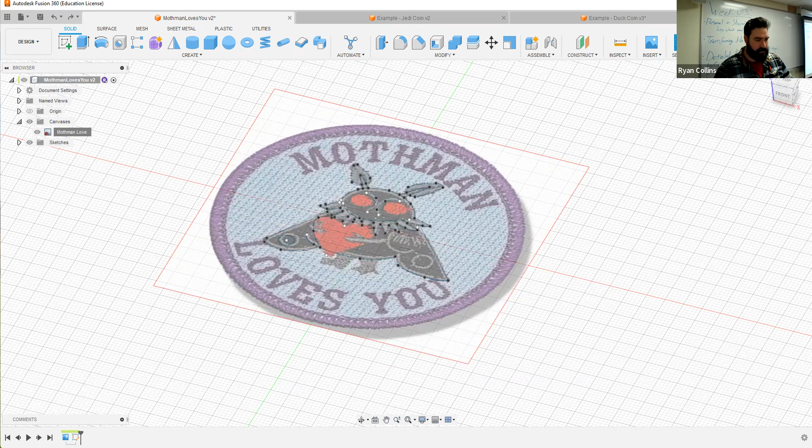Once I began, I'll go back into my edit sketch - if it'll let me. What's going on here? It's not allowing me to go back into edit sketch. What's going on here? There we go, that was weird.

All right, so just to show you the progress - mainly what I wanted to show you as a start point here is how to make text on here, as well as the edges, and then also add features like the keyhole, for making this a keychain or whatever. So to hide the badge for a moment, a couple things.

I got most of the profile done. I don't have legs on it or the eyes all defined or anything like that, and I did part of the heart. So I stopped here for a couple reasons.

One, because I want to get underway, but you can see the difference between closed sketches and open sketches. The difference being that if it's a closed sketch, it can be extruded as a solid body. Now, there are different features, and I'm going to show you that in a moment, but a closed sketch will have this blue hue to it.

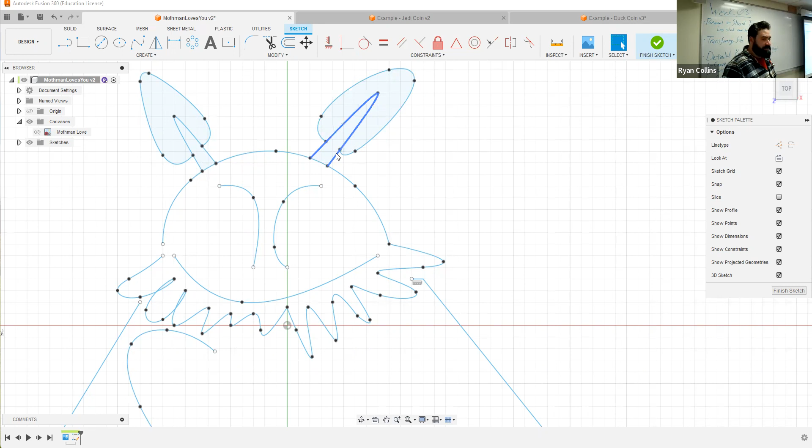When you mouse over it, it should show as a black outline - same here, right in the center. But if you're just mousing over the line itself, it won't; it'll just highlight the line. So if I select that, you can see because it's a fit point spline, it'll bring back up my handlebars and all that, so I can make adjustments.

The head and the rest of the body and such are not. Some of the features, I added like a little circle here, and you can see the little patches on there and that sort, and I'll make the arm and such anyway. But a couple things I wanted to show you how to fix, or rather how to continue.

So one of the things is this heart. I don't want to have to draw all the little features - of course, it's not very complex, but there are some other tools you can use. One of the things being, of course, the mirror tool. I did half of it; let's let the program do the work.

So in order for the mirror tool to work, which is this double triangle, select that - your toolbox will come up. You'll have your objects, you select the object. Next one is a mirror line - well, you have to have a line for this to work, but I don't want to add an unnecessary line here.

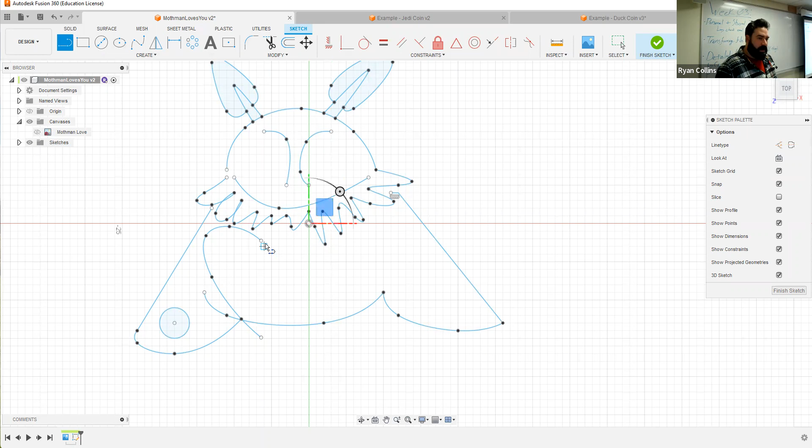So when I go to my line tool, or press L, I can draw a line straight up and down. And you can see as I mouse this over, it already snaps this little green dotted line down to the other point. That's because both of these are straight up and down from one another. But that would be a solid line - now that closes the heart.

Great, let me hit enter, finish. I don't want it to be that - I can toggle this line into a construction line, and this is why you'd want to use construction lines in this case. You can either toggle it on the toolbox over here or press X on your keyboard. Now that sketch is still open, and that is a dotted line. That means that sketch line is there for reference, but it's not going to interfere with my line.

So it's excellent to be able to use sketch lines to give yourself reference points. I can go to the mirror tool, select the object, then mirror line, my sketch line. Now I have that, let the program do the work.

Of course, you're going to see all these additional little markers here, tons of them. That is a constraint. If you go up to the top toolbar constraints, that is the symmetry constraint. That also means that if I make alterations to one side, it will do it for both sides, so they are symmetrical, they are linked. I'm going to leave it where it is.

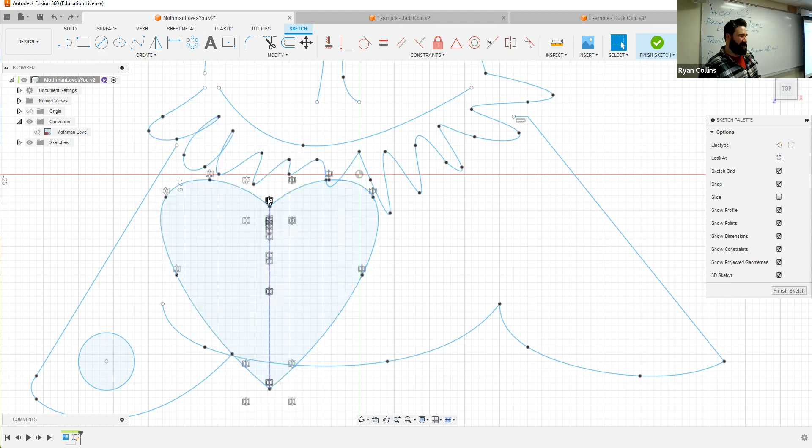Super duper. All those construction, all those constraint points does kind of make your eyes go crossways, but there we are. Now, this is one of the issues of making multiple sketches.

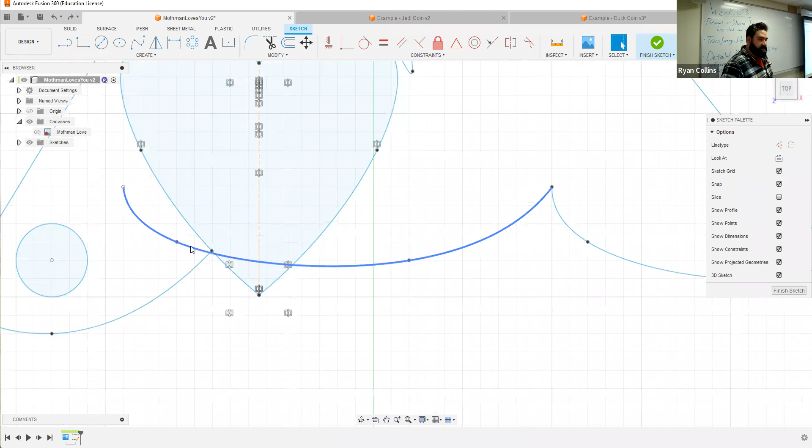Despite them all being on the same plane, you can see right now as I try to mouse over, because this is all on the same sketch, the bottom of the heart and the top of the heart are treated as two separate sketch objects because there's a shared line going through. So while it's not a problem right now because it's not very complex, if you were planning on making this a much more complex thing, you might want to make the heart on a separate sketch so that when you go to extrude it, it will be treated differently.

Let's see here. So one of the other ways to approach this, where is the thingy thing? It's pretty simple.

So like I said, this might be one of the cases where it might have been better to create this sketch on a separate sketch so that it's a different layer and you can toggle the visibility of it. Right now, this is all the same thing. If I want to do that, I can start a new sketch and just copy and paste this onto there. But let's stick with what we got right now.

So that's using the mirror tool. That's now closed, the little heart's closed. Let me open up my canvas again.

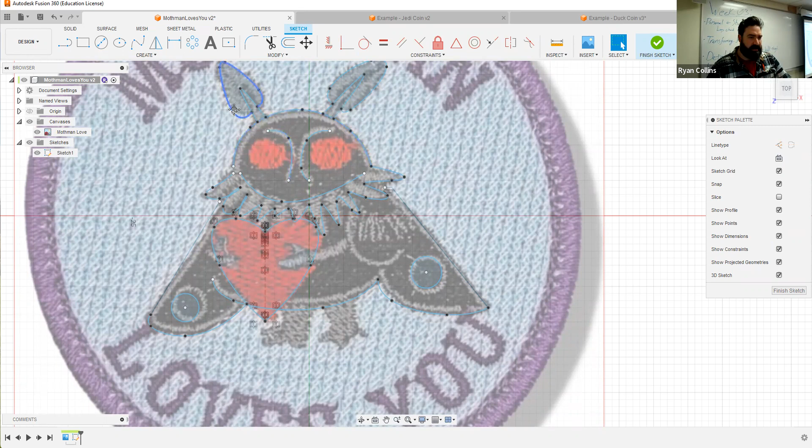I'll make a couple little things here. I'm going to try to snap a couple of circles here. Great, I can make the eyes a little bit better. But let's close up this sketch so at least I can actually make this a finished thing.

So now I have these three points. I can either add some lines, or I can also drag this. I can click and drag and pull this point around. I'm not going to have a lot of motion with it, plus I kind of like where it is, so I'm not going to mess with that. Let's leave it where it is, and I'll just add in some additional lines.

So a couple things you can do with that. If you've got a line going and you don't want to draw it by hand, go to Modify. You can use the Extend tool, and that literally just extends an existing line to what it assumes is going to be the next, taking the geometry and trajectory of that current line.

You mouse over, and you can see this little red line that pops up. Select there, bam, it throws in an additional line, and it already almost connects over there. So to finish that line, because I still have the tool active, I can now mouse over that line, or I can drag that vertex to the adjoining line. Why not let it snap closed? Now the whole top is closed.

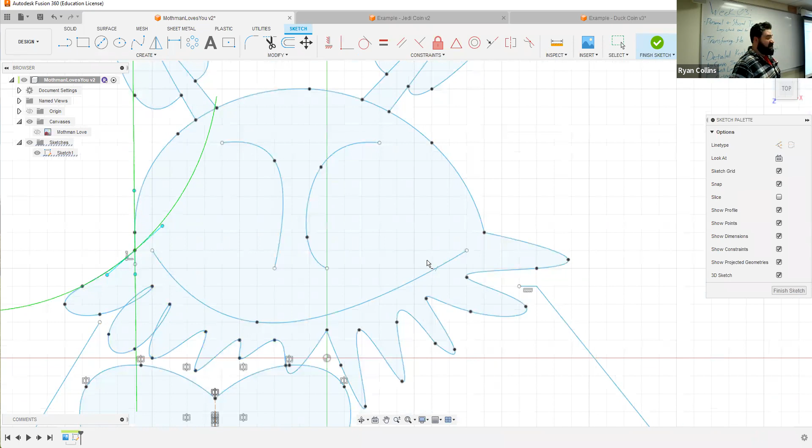Convenient. This got to be weird, I don't know where that little angle line came in. So let me trim that off of there. Hit escape.

That all is still good. Let's go to trim, I just need to nip that little chunk off. Great, go back and use extend again.

Extends the line to the next. You can see you can keep going because it assumes that you want to extend that line to the next point that it would potentially cross. Again, Fusion tries to be intuitive, but sometimes that intuition gets to be problematic.

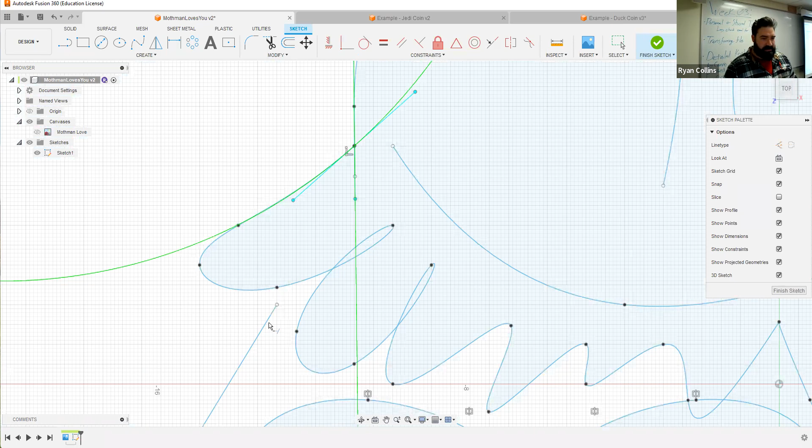All right, that's all closed. Let's use extend again to close that up right there. Great, now I have this all closed. This is all a closed sketch. All right, so a couple things I will note, and I'm going to show you how to address these.

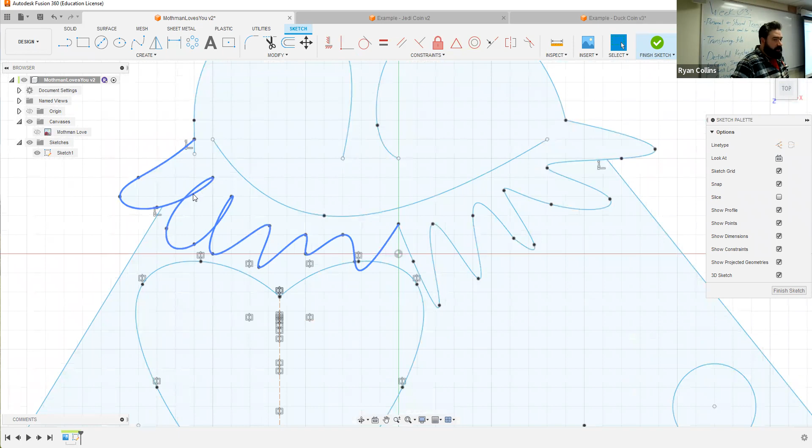Fusion works great on a lot of things, but anytime lines cross one another - not intersecting, but going back and forth over another - that can cause problems. You see how these are overlapped here, and I'll bring my canvas back up. That's just me using fit points.

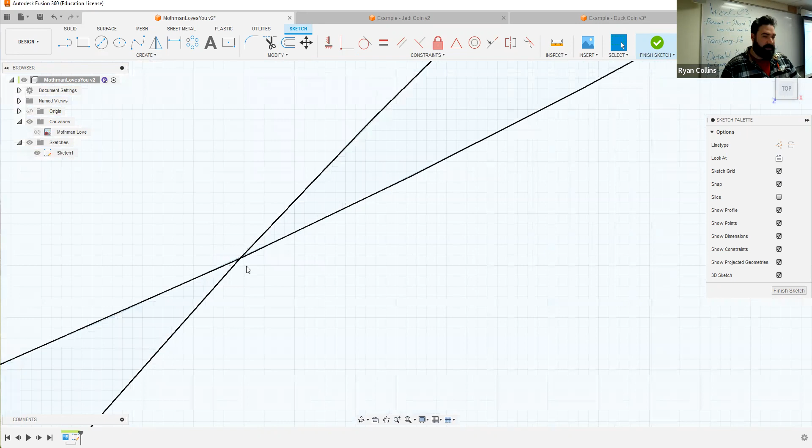I might be better off editing those out, or at least trimming a chunk away. So I might go back and use the trim, and you see the problem here is, oh no, that's going to trim all of it. That's a problem. So if I needed to edit that away, what I'll unfortunately have to do is draw a line between here.

Now I should be able to isolate that and trim that away. I'm going to see if I can just use that line as a construction line. So I toggled that, hit X. Let's see if that works now. Good, still does. So that way I can use that line, trim that away. Yes, it's going to give me a warning because constraints were changed. That's okay, but now that's missing.

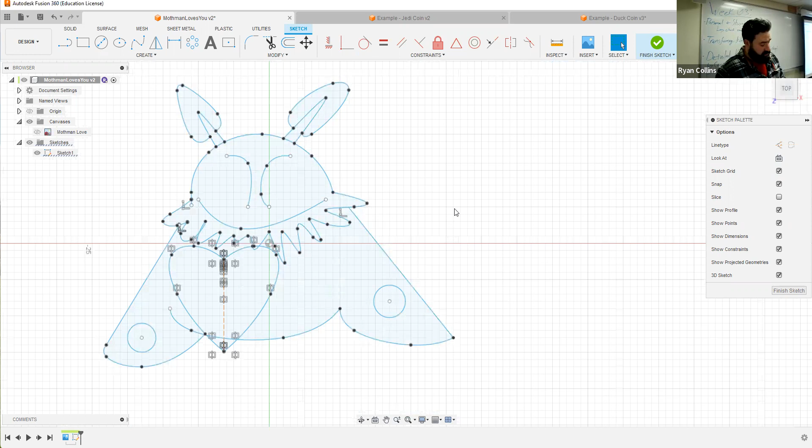We're good. That should work, so I can go along and do all that. I'm going to show you what can happen without it. All right, so this is all closed sketches. Mothman is close, but not quite there. Let's work with some extrusions. So let me hit finish sketch, save. I'm going to add myself some notes: Mothman outline done. Great.

Now I can start to play with some extrusions. So like I said before, you can stack extrusions as well, and that's how you can make multi-level things here. So let's start with resizing, and I'm going to hit the home button so I get a 3/4 view - it's easier to see what I'm doing. Just start extruding. Mouse over the extrude tool, or as the pop-up shows, you can just press E.

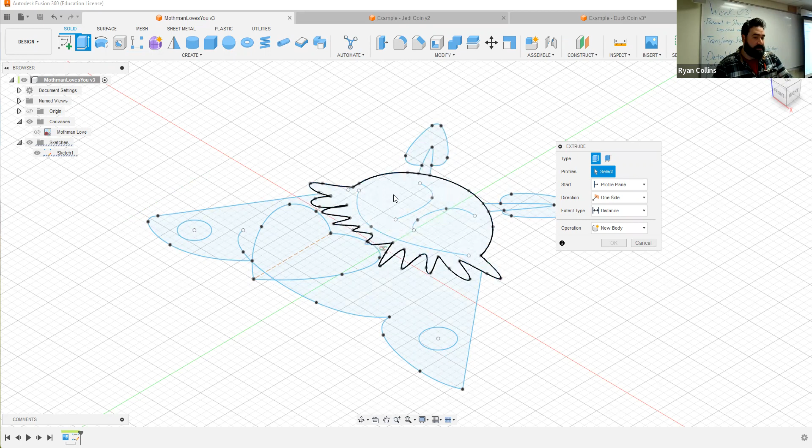That works. So most of this is one body, or rather, one closed sketch - the head is one closed sketch. Let's say, I don't know, 3. All right, now right now that also came up as green. That's probably not how yours is going to look. I'll address that in a moment.

First, I want to talk about the toolbox here. So you have, first off, types: extrude and thin extrude. I'm going to explain thin extrude in a moment - this is a way where you can extrude just a line that is not a closed sketch. So I was kind of lying to you earlier, but not entirely.

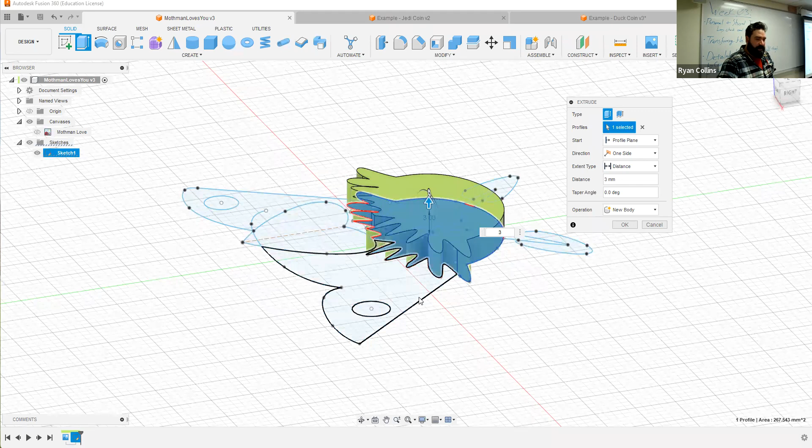Your profile selection is obviously the profile. If you want to add more, you can keep going, but that's not what I want to do, so back out of that. Oops, since I accidentally hit Control Z instead - I should have just zeroed that out.

Just as a reminder, you can go back up, hit the extrude, press E, or if it is a recent command, right click on your mouse and the recent tools or most used tools will come up. Going straight up is the one you just used, so I can repeat extrude - it's just a way to streamline what you're doing. Select that one again, go up to 3.

Okay, I'm going to say start at profile plane - this will come in handy in a moment. You have some others, offset and object. Right now we're going to leave this at profile plane at the start point. Direction, one-sided - you have two sides and symmetric. If you're making something extrude in both directions, right now we're just going to use one-sided.

An extent type is distance, where you can either add it in numerically or use the drag slider. To object, it can snap to another object - we'll ignore that for right now. And all is just all the things, it will just snap to anything visible. We don't have anything visible, so ignore that. We're just going to stick with distance. Then there's your distance right there, 3 millimeters.

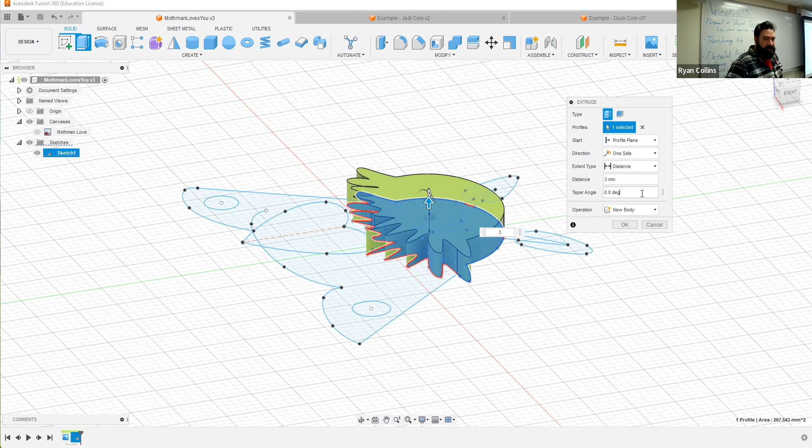You can also taper this, so you can add an inward taper or outward taper. Too much, and it will go nuts on you. Let's see about - wow, 3 is, even 3 is too much, huh? Okay, it's giving me an error because of the complexity of the little Mothman beard. If this were a more simple form, it would be able to perform that much more effectively, but because of how complex this is, it gets weird. So we'll just leave it at 0.

There we are, all right. Operation: new body. Now, as we start to add more, it will automatically try to join them together. You can either leave them as all individual bodies and join them later, or just let the operation do it and join them as you go. I prefer to keep things separate in case I want to make individual operations and then join everything later. For me, I just prefer to work that way.

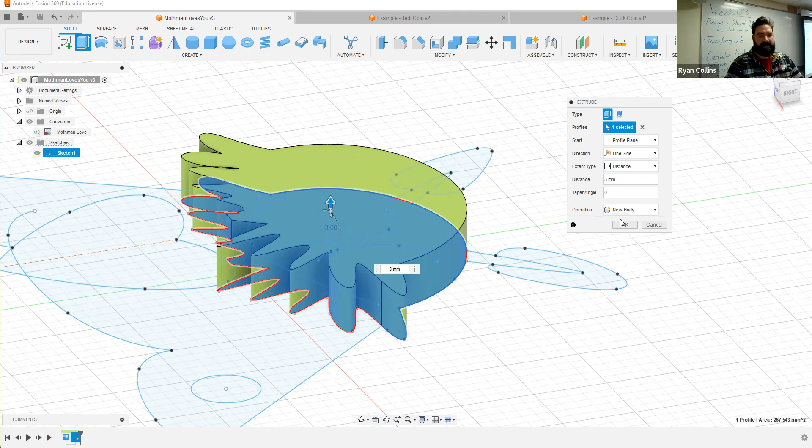With this project it doesn't really matter, it's however you prefer, so I'm going to keep it as new body. Now, like I said, once you finish one sketch extrusion, Fusion assumes you're done with that sketch, so it hides it. Just go back to your browser, your hierarchy tree, find the sketch, toggle the sketch visibility, and it'll pop back in.

So real quick, the reason this is coming up green and your default is probably coming up as this metallic silver is because I was using the appearance toggle. That's pressing and holding shift and hitting... whoops, I hit multiple things, not what I meant to hit.

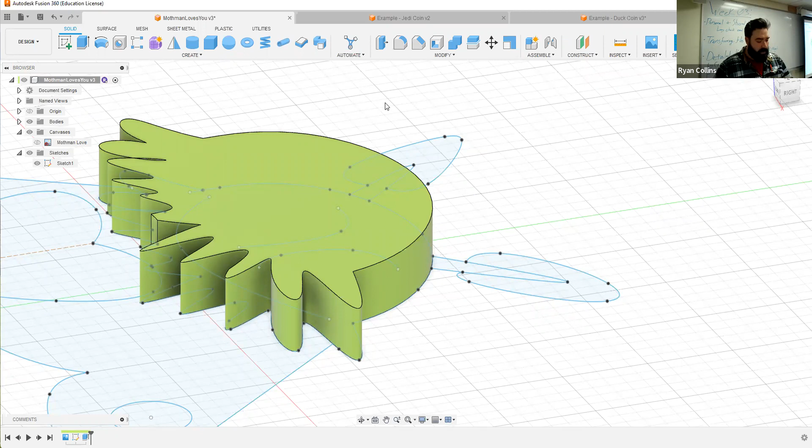That toggles it between automatically assigning colors to different components or appearances. We're going to talk about appearances in a minute, but appearances are basically how you can apply real world surfaces to the model so it looks like the real thing. It has no effect whatsoever on how it gets printed, it's just for modeling realism. So I'm going to leave it green because it's easier for me to see.

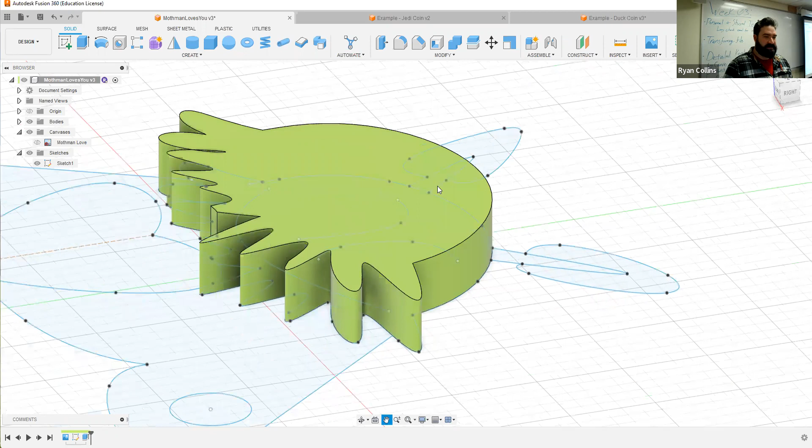All right, great, so got all that. You can see also how it did not add that little notch there. That's because the heart was there that intersected. I should have made that a little bit higher, so I don't know yet. So speaking of, let's go ahead and extrude the heart.

Whoops, I accidentally hit joint before. All right, now like I said, there's that line in there. I want to make sure that I'm getting both sides of the heart. All right, and we'll go up 2.

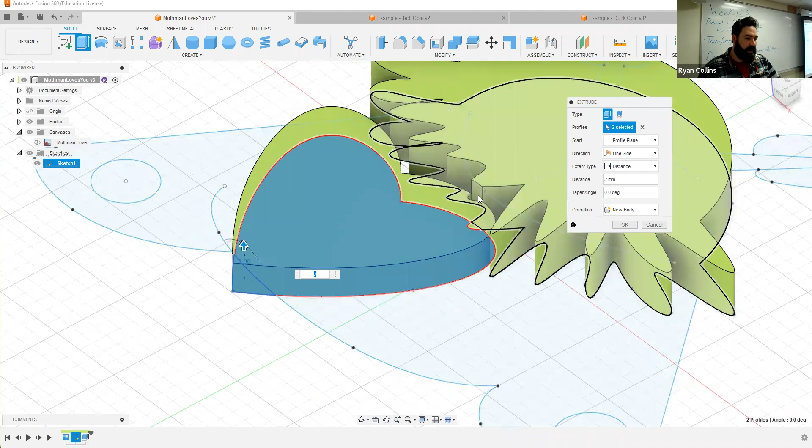So one issue, it's leaving that little notch there. I will need to go back into that first extrusion and actually alter that. So because these are only barely touching, they're only adjacently touching, not actually overlapping, the operation is staying as new body. So I'll leave it at that.

I want to go back and fix that. Go down to the bottom of the screen, go to your history bar, right click on the previous one, go to edit feature, and now I can just make sure to select that little notch, boop, and it adds that little blip there. There we go, that's all. So now it makes sure to overlap.

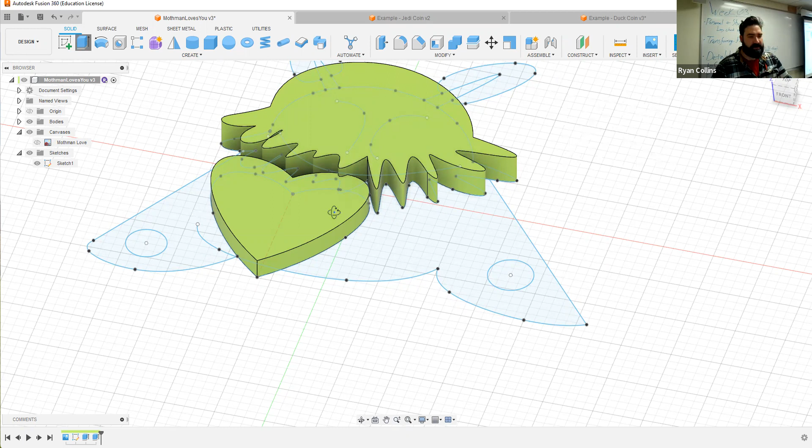Great, so this is how you can keep adding different levels. Keep adding extrusions, and I want to make sure to get all of those. Now you see how these are red lines as it's intersecting this existing body? This is because you have the potential to cut into the body.

Now here you can just drag up or whatever. Now that these are joining, now that these could form a whole body, the operation has changed to join. I can go back and manually go back to new body if I want to keep it that way. Fine, there we go, I can join all these later.

Great, so we got a bunch of different features here. Again, I can always keep adding stuff. Let's do a couple more. I'll add the little antenna, we'll make that to 1. Then I'll go back inside to the intersections here, select both of those, and we'll say 2.

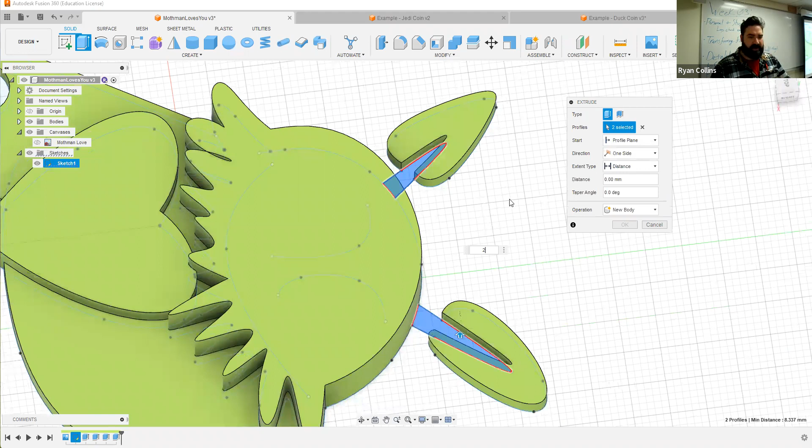Again, it's going to try to join those. You can if you want, or leave it at new body, doesn't matter. All right, so now I have these multiple things.

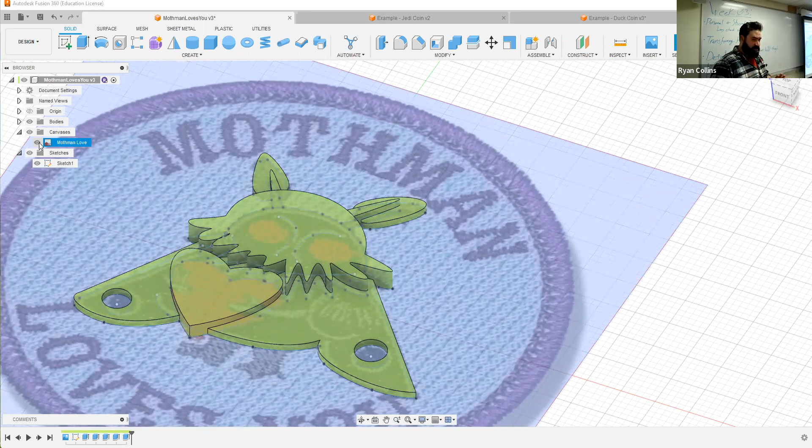So I do want to add some text and a larger diameter around it so I can make this more of a full badge. You do not have to make this a singular badge, this could just be a floating body if you want, up to you. But in this case, a couple things I want to show you real quick.

I told you about the other extrude option, so let's save here, full extrudes, just making some notes. Again, when you open the data panel, you open up your different versions, that's the little notes there for myself: sketch started, Mothman outline done, full extrudes. Just to help you on your versions.

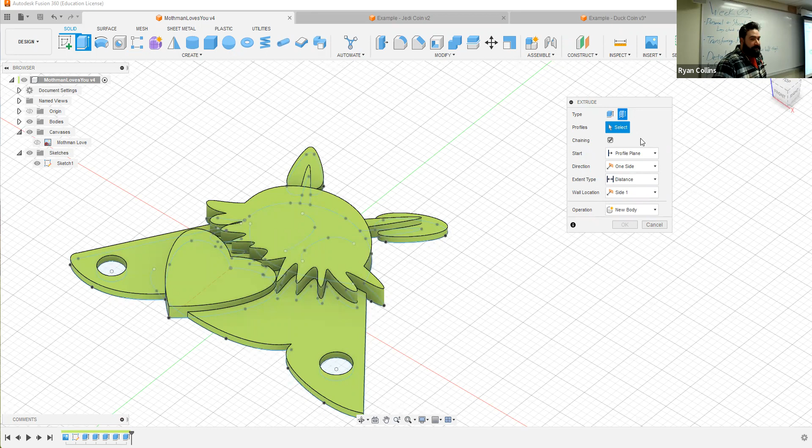All right, so I'm going to bring up the extrude bar again, but this time I want to play with the other tool, thin extrude. This is a way to make a single line a full body. So what it does is it kind of combines the extrude tool with the offset tool. So what I'm going to do is I'm going to select those 2 eyebrow lines.

There we go, now I have a couple of options. Right now everything is default, everything is staying where it was. I'm going to use the drag tool and drag upward, so I'm going to drag upwards up through the body. Now, right now, you can see how they've changed to red.

Now, as I extrude through, the operation has gone to cut. That's because it assumes that since I've dragged those up through the body, I actually want to cut that away. So you can do that, or you can switch this to join, and it's going to be a thin extrude right there.

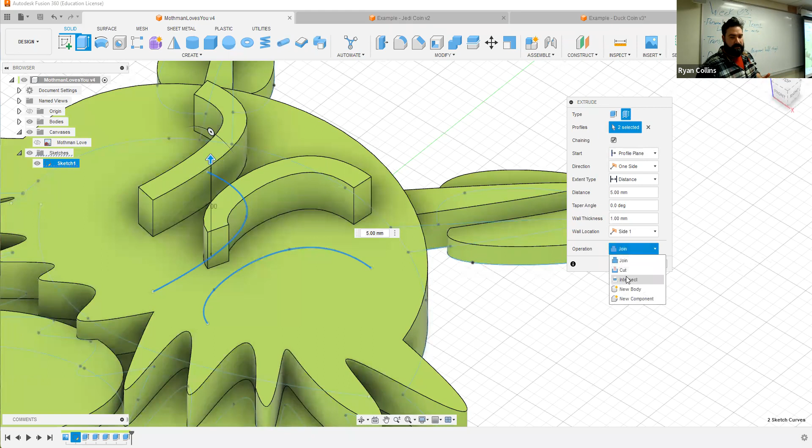Other things on here—this is extruding all the way from the bottom. What if I did want that to cut, but didn't want it to cut all the way through? What if I just wanted a slight indentation? This is one of the parts where you have to start changing the way you approach something, rather than thinking like, okay, I drew this on a piece of wood and I want to cut this away.

Well, I would need to chisel down into it from the top. Actually, that's a little bit closer to reality. In this case, where I had extruded up from the bottom straight through, that's not how it works. You actually want to treat this a little bit more like how it would actually be carved in. So to do that, you can use some of the other options here.

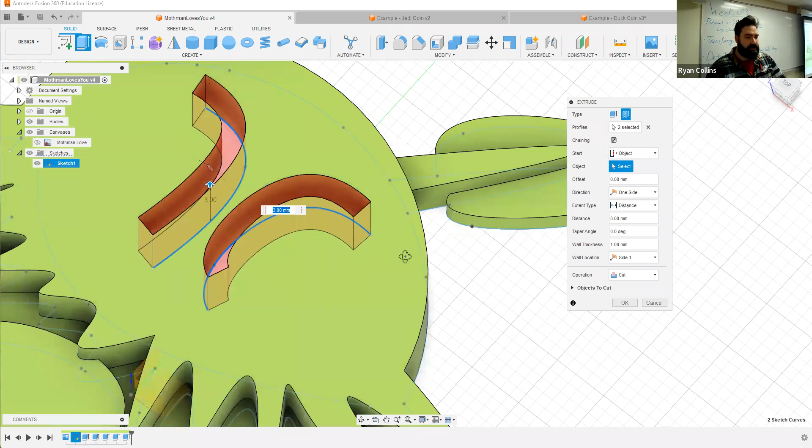Things like start—start is at the profile plane. I can start this either way. Let's say start to the object. I select the top here. It's now going to extrude starting at the top. And if I extrude upward, it's going to go all the way through.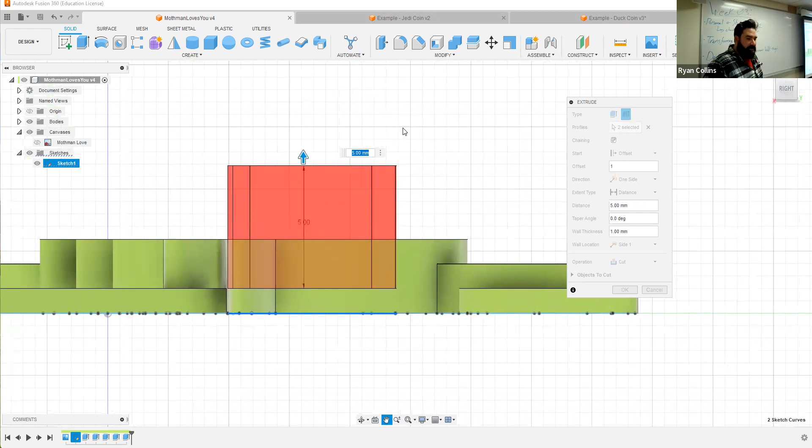But that's still going to mess with me. So let's instead change to offset. I can offset that by, say, 1 millimeter. Now what it's doing—let me go to side view here—there's 1 millimeter between where the extrusion started and where it's drawn. So I can actually start from right there. Really slick feature.

And then I can go upward and cut through. That said, I can also use the object option. Let me just zero all this out—distance 0—because sometimes it does weird things if you don't zero it all out. I can start this at the top, and then instead, the sketch, or that extrusion, will begin at the very top.

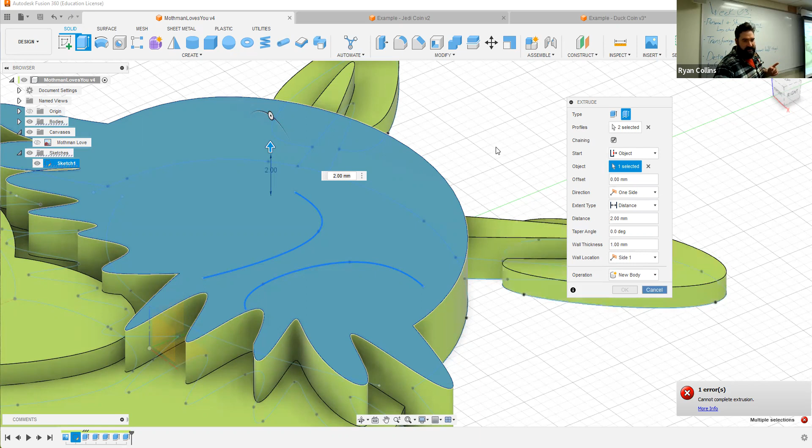All right, what's going on here? Cannot complete extrusion—why? What's your problem? It's giving me weirdness. All right, sometimes you have to restart the extrude. Let's do thin extrude. I have had problems doing that sometimes where you start from blank or change stuff around, and if it gives you weird errors, it's best just to cancel that tool and start over.

So now I'm going to start. The first thing I'm going to select is object. Select the top face here. Now when I extrude upwards, it still gives me the same error. What's your problem? I'm not sure why it's giving me that error. That's weird.

Okay, well then ignore it. We'll just use the offset tool, same thing I did before. We'll do an offset of 1 millimeter, and it starts going up. Let's go up 5—doesn't matter. Okay, there we go. Direction, we're going to leave that as one-sided.

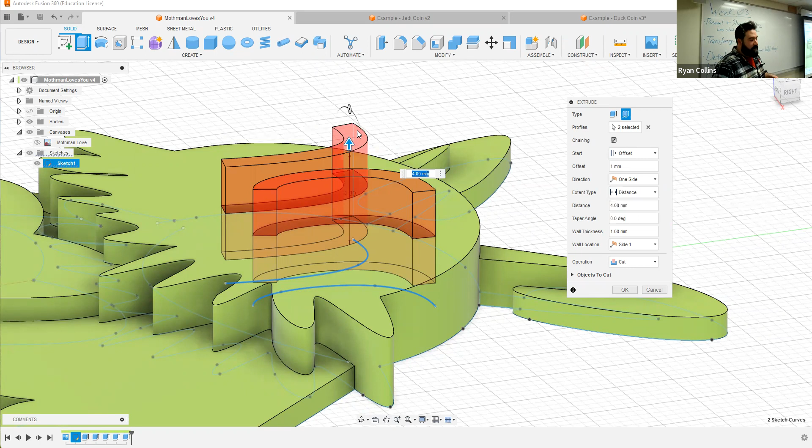Now, the other thing is extent type. Right now it's been distance. You can use the same sort of selection features as before. So distance is just like adding and subtracting numerically or using the slider. However, the parametric modeling option in this case would be extent type, selecting object, and I can select that top face. Now it's going to extrude those little cuts only to the top face.

But the good thing about that is—and I'll just leave this as cut for right now because I want to show you something—okay, it's going to cut all that, and we can also adjust the size of those, the diameter, or sorry, the thickness of those line cuts.

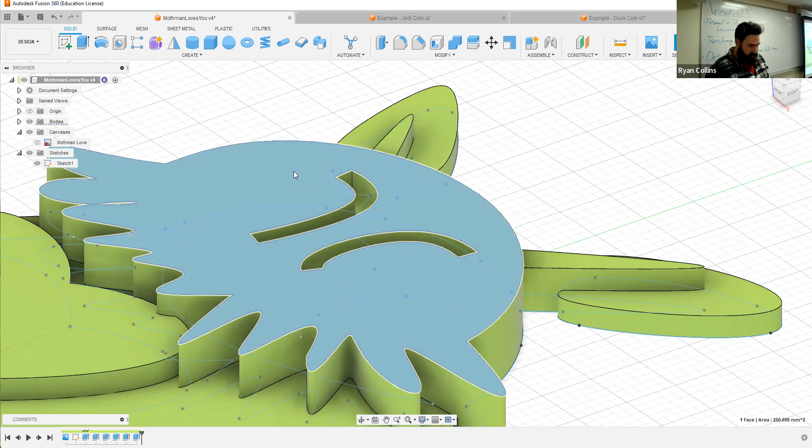That's fine. But if I had done this just by distance, say I put in 3 millimeters, so that's how thick it is, right to the top. If I decided, oh, you know what, I want this to be a little bit thicker, and I move the face up, I might now have to go back and change the dimensions of the extrude and everything. But in this case, because I used the extent type—let me open this back up—extent type to object, and selected the top face here. And again, I use the offset, so it is starting a little bit further, 1 millimeter away from the bottom.

Now, if I go back and change that first extrusion, I could change this to 20 millimeters thick.

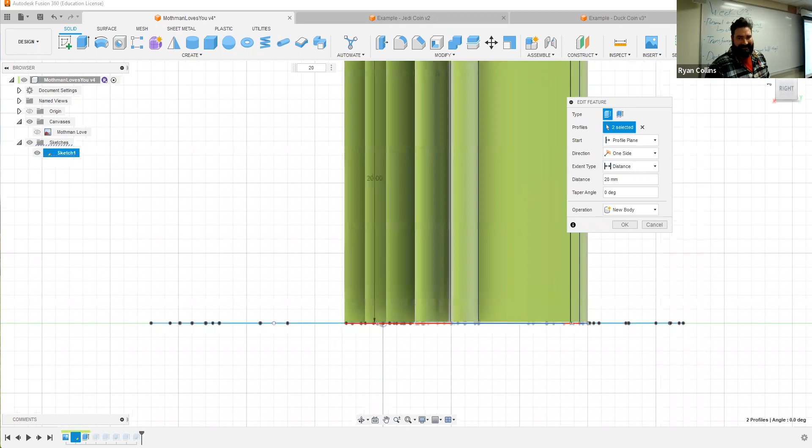Again, because I went back and changed this in the past on the history slider, it recalculates. It will always make that cut to the top of that face. So no matter how thick I make that cut, because I chose the extent type to the top of the face, it will always make it there. So that's one of those things, and if it's an option, choose that option. It makes it a little bit easier.

I obviously don't need this to be 20 millimeters thick. Let's go back to 3 or 4 or something. There we go. So there we are.

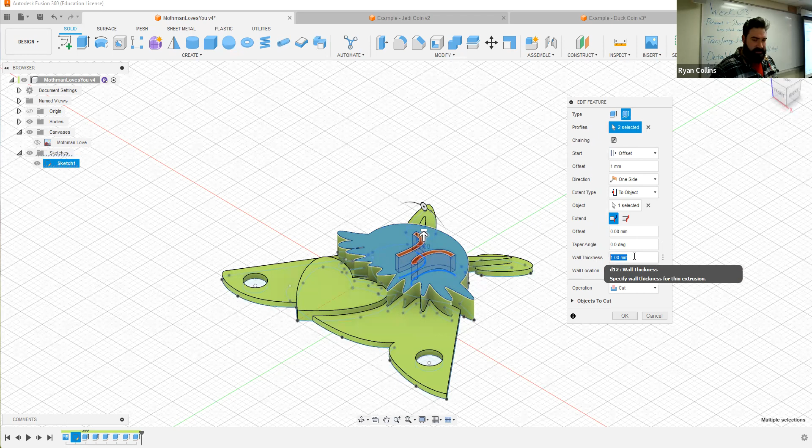That final extrusion, last thing I wanted to show you, is you can also adjust how thick that is. Down toward the bottom here, it says wall thickness. That's going to be 2 millimeters thick because the wall thickness is 1 — it's offsetting on either side of that line by 1 millimeter, so 2 millimeters total. If I only wanted it to be 1 millimeter thick, I would say 0.5, and now it's a little 1 millimeter slit. There you go, now it's kind of got a little adorable angry face or something.

I don't know. So we'll add features and yada, yada, yada. Okay.

So the next thing is I want to add text and such, so let's do that. I've made all these extrusions, these are all different things. Fine, fine, fine.

Let's start a couple of new sketches here. This is why I would prefer personally to make these intentionally separate sketches — it keeps things separate and makes it easier for me to navigate. You choose how you want to work, but if you're trying to make like a single image and extrude all that, I would keep that all as mostly one sketch, or at least major features on separate sketches. This would be a major feature change.

So looking from the top down, I want to make this as kind of a badge here and add my text. All right, so let's start a sketch. I can hide the existing bodies, starting on that top plane here.

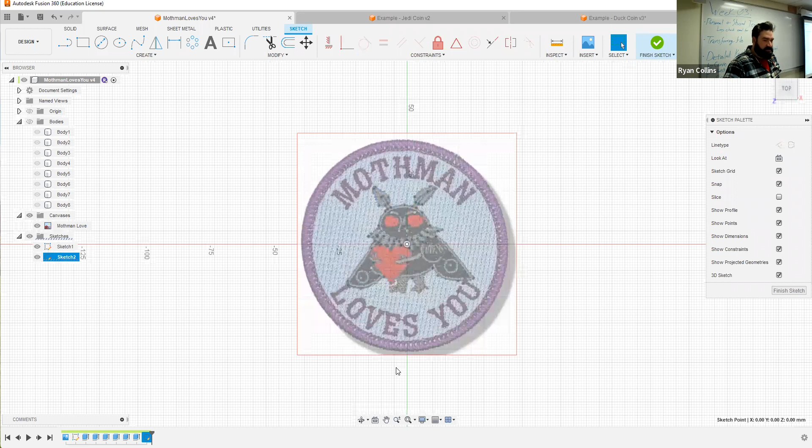Now, the problem is this circle isn't quite centered at the origin point in my sketch plane, the intersection between the x-axis, the red, and the y-axis, the green. So it's harder to use a center point circle, because if I try to get right there in the center, you can see it's close, but not really. Now, honestly, this is close and it's perfectly fine. You choose how you want to work.

I don't like that, so instead what I'm going to do is go to create and use a 2-point circle, which allows me to choose 2 points and creates a circle between those. So I'm going to start somewhere at the top, as close as I can get to the top of that circle there, and draw downward. It's a lot closer-ish. Frankly, it's close enough. All right, there we go.

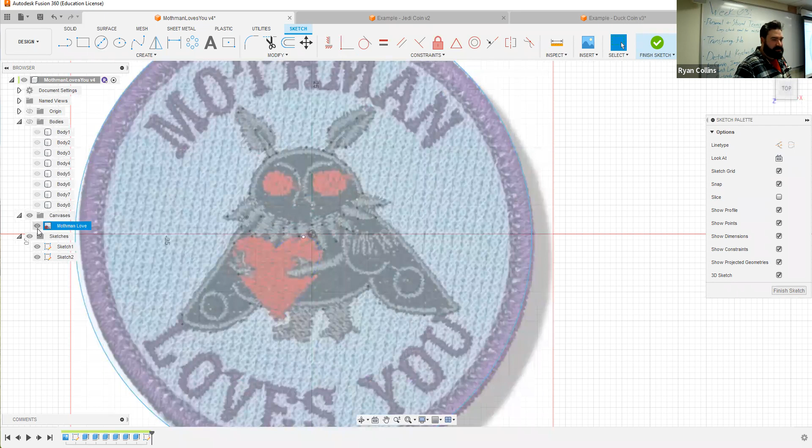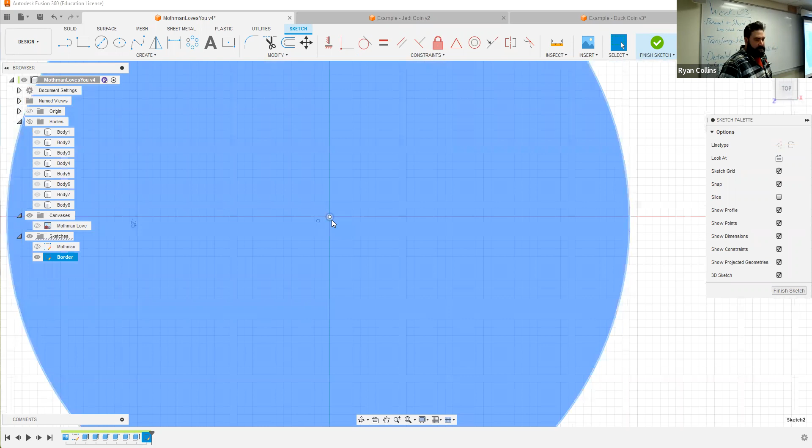So now I've got this circle. If I want to make any of these outlines, now I have a center point. Let me hide the canvas, and let me hide those first sketches. Let's see here — Mothman, there we go. And we'll rename this one as border, if I can spell. There we go. Okay, so that's how you could do that. And you see this point floating out here — good, it's separate.

So this is how I can work, either making center point circles or using offsets, stuff like that. But before I start all of that, let's see about taking a break, because I just checked the time. So let's pause here. Okay, quick pause.

So in trying to get the circle a little closer, I do want to add like a double layer, but I also want to make this text. So to get this double layer, and because this is in the center, I'd made that 2-point circle, but when I hide the canvas, you can see there's my origin point, but now there's this little dot floating here. This is the center of the circle I created.

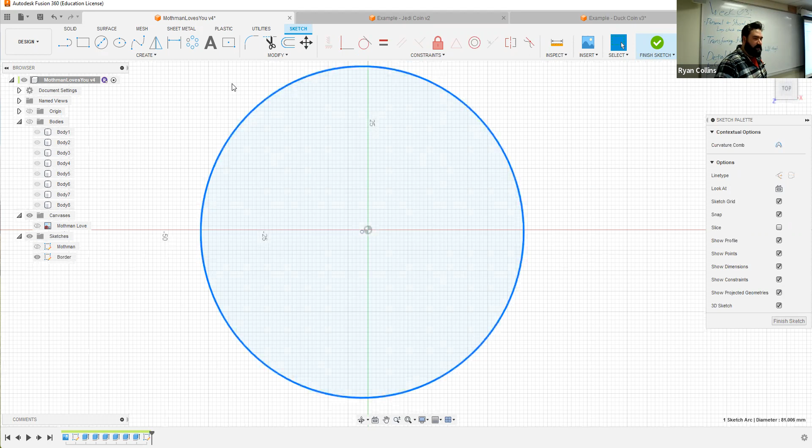So I have 2 options: I can create a center point circle based off of that and draw outward, or I can use an offset tool off of the outer one. In this case, I think I'm going to use the offset, let's say -3. Because again, if I use an offset based off of that outer circle, if I change the size of that outer circle, the offset will stay the same thickness of a band, meaning it will always be 3 millimeters smaller than that outer circle. Just a couple ways of working.

All right, so super duper — the reason I'm going to do that is because I can extrude that and make different sizes.

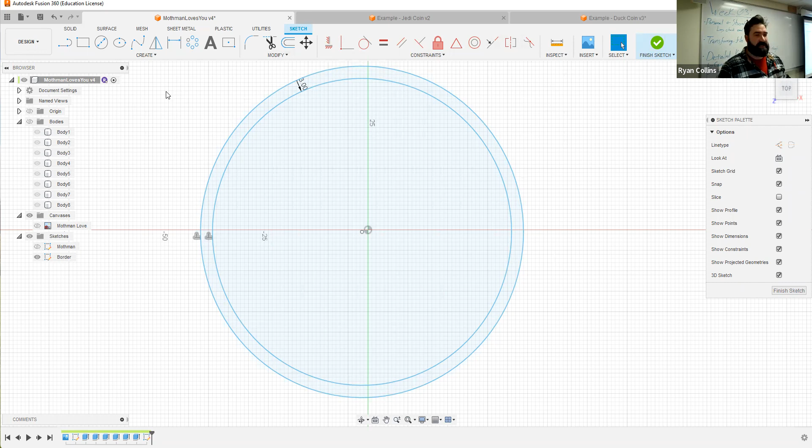But let's make some text. All right, so I'm still in the same sketch environment. I don't have to start a new sketch. You can if you would like to. In this case, I'm not going to, because I don't feel like it.

The text tool is just a big A here. Now you open this and you have 2 options, and the mouse over says so. You can create the text inside a rectangular frame, like creating some text block in like Word or whatever. You choose your program, click and drag a box and create text inside of that, or you can create text along a path.

That can be a pre-made geometric path like a circle, or it can be a squiggly line. So it's up to you. Your 2 options are here. The text toolbox comes up. Draw text is the first one, and along a path is the second one.

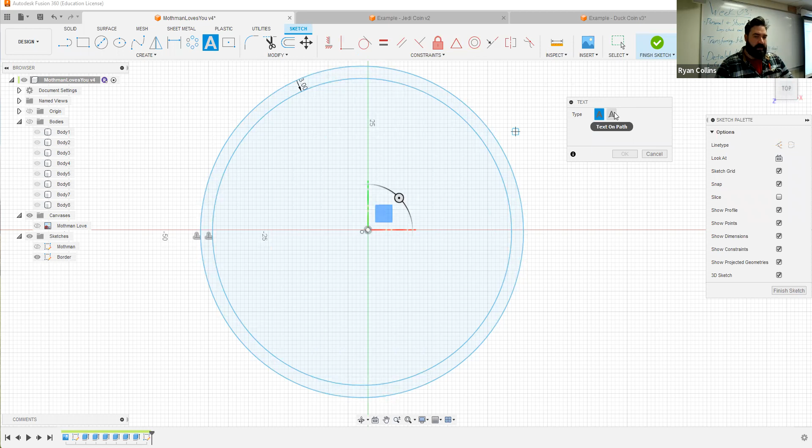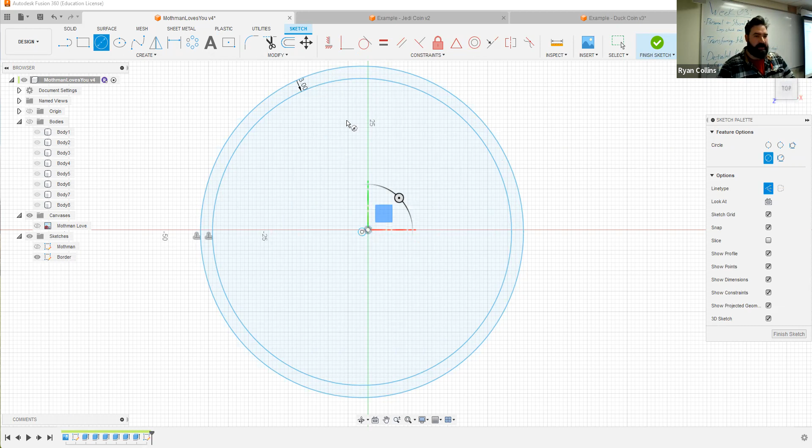For that, I need a path. So let me cancel out of this real quick, and I want to draw a circle. In this case, I am going to choose a center point circle, but I want this to be a construction line. I'm going to toggle the construction line, select the center, and let's put it somewhere there-ish. Sure, 60, fine. Cool, all right, that's going to be my path.

Open up text, select text along a path. Your only option is to select the path. There we are. Now your standard text toolbox comes up. And let's just say, well, you can see the sense there. Mothman, kick your feet off the ground.

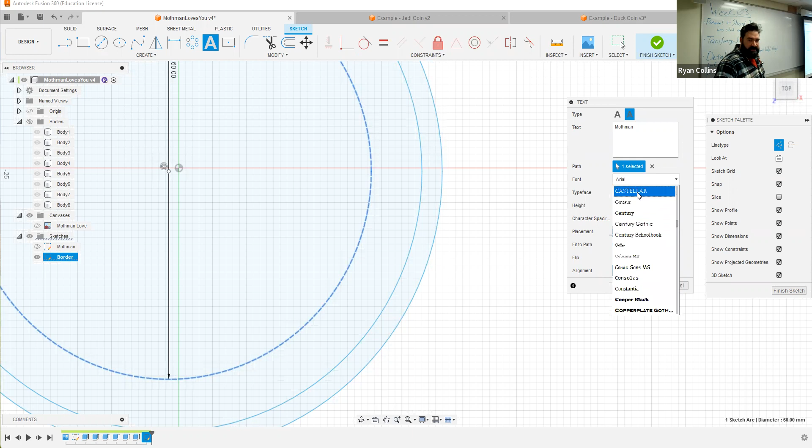Sorry. So from here, it works like any other text tool in that you have your different fonts right on down to Centaur, Century. Ooh, Castellar. Very fancy.

Now, one thing is where it starts. You can go bold, you can go italic, all of that. Ooh, snazzy. The issue is that some fonts will not translate to 3D printing as well because of the thickness of the nozzles. You can experiment with this. You'll find this out later. But in the meantime, we can play around with fonts.

You have your standard heights and such like that. So if I want to make it smaller, there we go, Mothman. You can play with character spacing, the kerning, if you want to make that bigger or smaller.

Now, you have a couple of options. You have placement above or below the path. You cannot place it through the path. So this is why it's good to be able to make your circle as you want. That way you can go back and change the size of that circle and it'll recalculate for you. Fit to path will disperse the letters evenly along the length of your path.

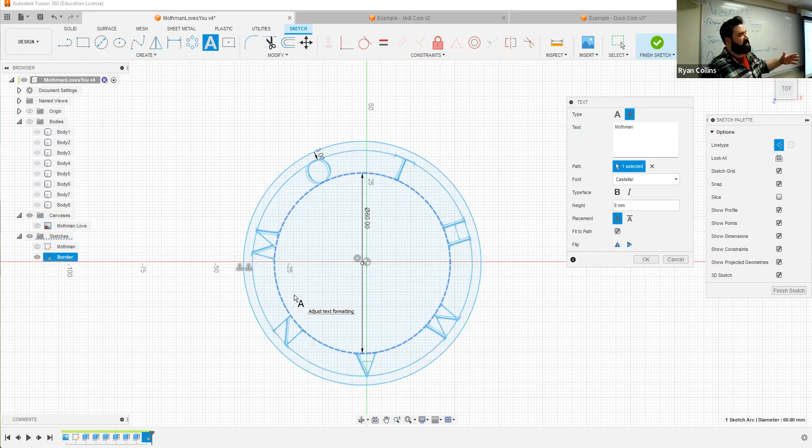So if it's a circle, it'll spread them out evenly across a circle. If it's along a squiggly line, it'll disperse them along the length of that squiggly line. If you're turning this into, say, a stamp, you have the option to flip them so they're reversed, and you have your standard alignments: align left, center, right. Now the problem is, okay, well, I want it centered in my sketch.

This is where it kind of gets a little screwy in that if you don't have a defined area, meaning you can't see a defined area of where that sketch or where that path starts. So if it's a circle, well, where's the start? Where's the end? Yeah, exactly. Essentially, I have found that the circle begins and ends as far as a path goes along the x-axis, and it's left of the y-axis.

So over here on the negative quadrant, that's where it seems like that's where it starts and stops, because when you hit back and forth to a line left and a line right, you see it's on opposite sides of the x-axis. There you go. But if you want to center this, you can go up into your text box and just start hitting space until you get to where you like it. So kind of a pain, but that's how that works.

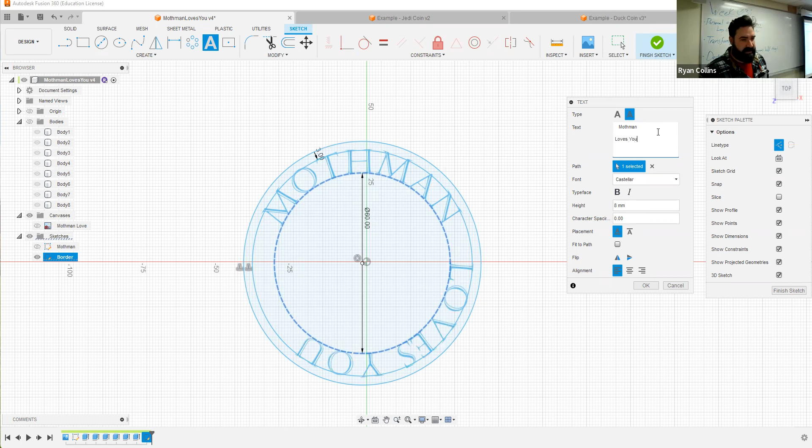You can always, if you want to center two things, like so this image is Mothman loves you. The loves you gets really tricky to space out between that. So I could do like... you see how that gets a little screwy. So I can keep adding spaces in between, but you see that flips and I can't flip them all or not.

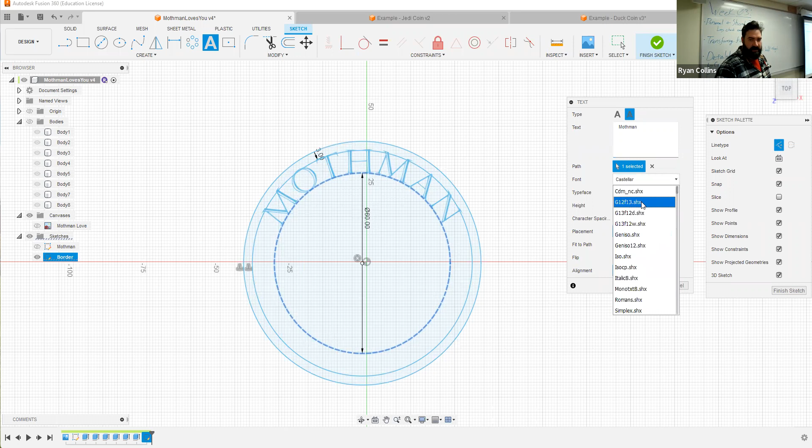So this is where it's more convenient to just go ahead and make two texts. So let's go with something a little bit more standard. We'll just go with, yes, it's more boring, but it's a little bit more effective to work with. Okay, so hit there. All right, Mothman. I can do another one, select along the path.

It's being used—apparently it won't let me reuse that same path. I forget that it does that. That's obnoxious. So I guess I'm going to have to make a second circle right there, same thing. That seems like a really foolish way to handle it.

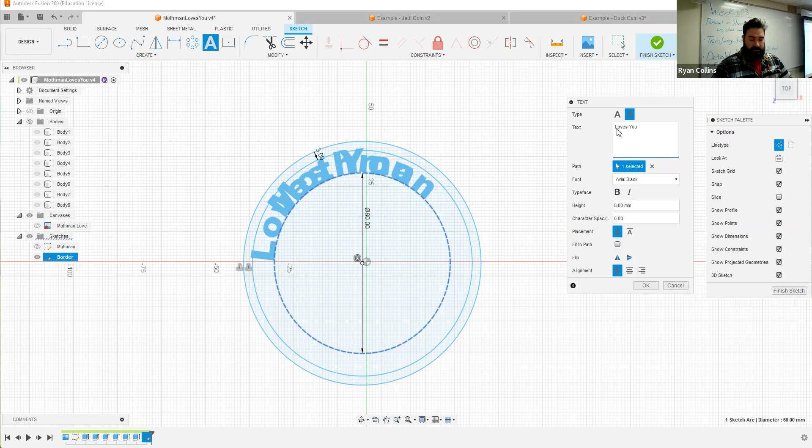Let's just go ahead and tab along. It's upside down, so that means I can flip it. Oh my God, that is just a lot to deal with, isn't it?

Why is it not moving now? Jeez, so unfortunately a lot of this does get a little bit irritating. There we go, a little bit better. So I had to make it in two separate ones. That's a pain. All right, close enough, we're going to deal with what we got.

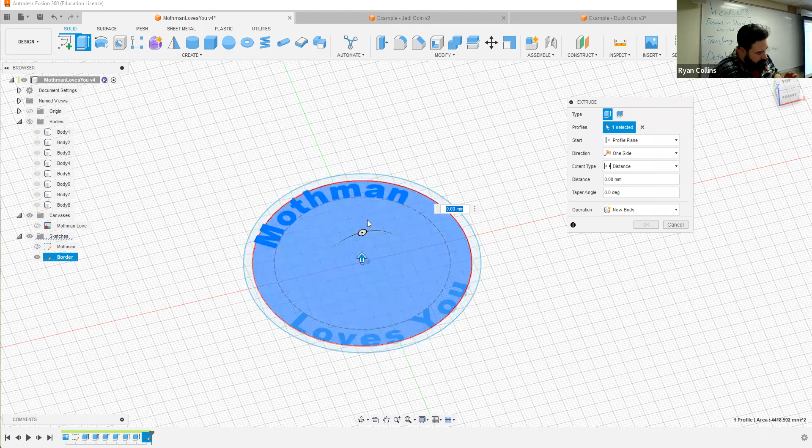Last thing about this is extruding. Right now, if I extrude this, these are all saved in a single sketch. If I go to extrude, say the base, it is not selecting the letters—letters are treated a little bit differently than full sketch bodies are.

In this case, because so far all the bodies were going upwards positive, I'm going to go downward a bit. I'll just say -3, that seems like a reasonable amount. It automatically wants to join, but I'm going to leave that as a new body for the moment.

The standard sketches disappeared. Now, again, I made that border up here because I wanted to add an extrusion going upward, so we'll go like 1. That just adds a neat little ring there—that's all, you can see I just added that.

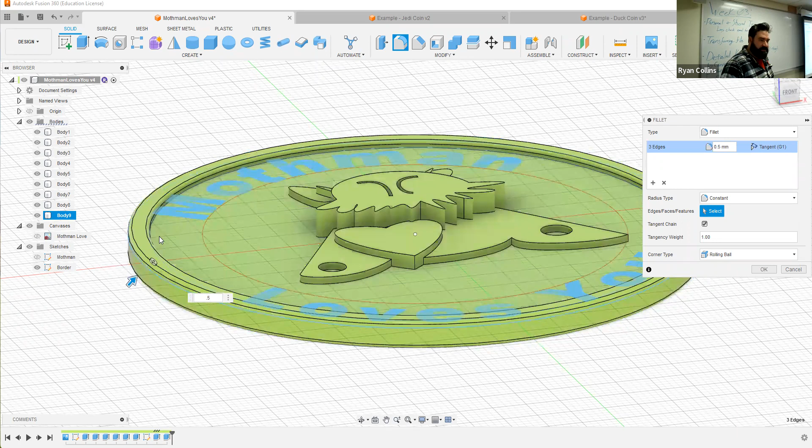Because what I'll probably end up doing is adding some fillets to this, which just makes round things out of square things. We'll say like, I don't know, 0.5. There you go—so you see a fillet just made those edges round if I go to front view. So if you want to round stuff over, that's a fillet. In this project, not as necessary, but it is handy.

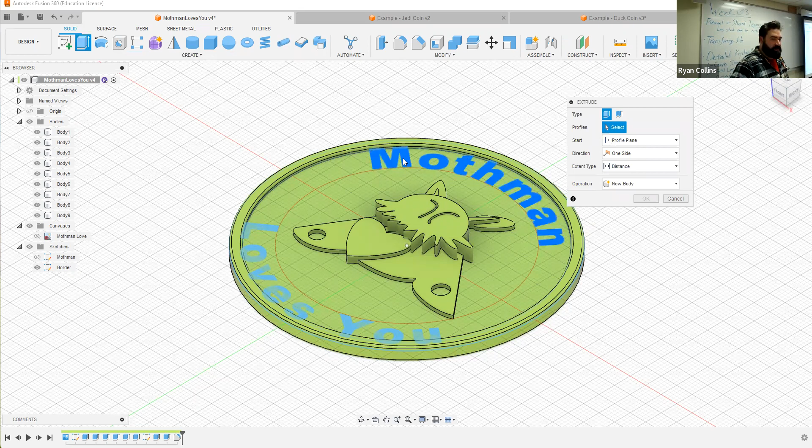Now the text, however, operates a little differently. You can select all of the text as one sketch object, so let's say go 1. Now, the reason it's trying to cut is because that font overlaps the outside there—I don't want that. Let's go to new body.

Now you can leave it as join, and I actually encourage that—note the amount of bodies I have under the browser tree here. When I hit OK with new body, each letter gets its own new body, so that gets to be kind of a pain.

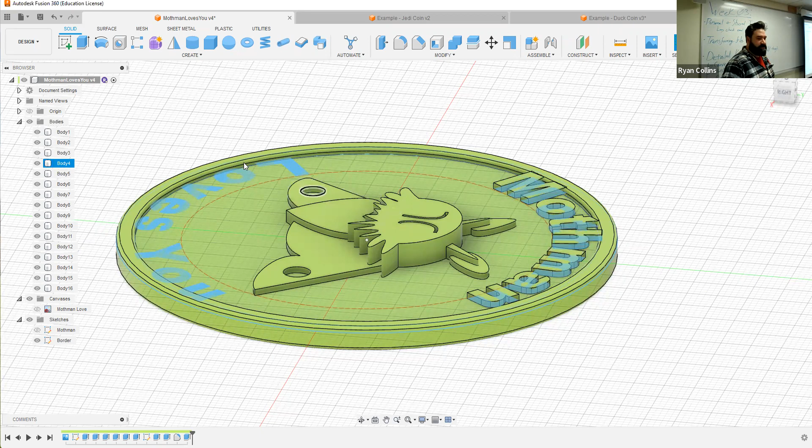So I encourage you, when you extrude text, go ahead and join that way you don't have all of those other parts. I'll just make sure to add that to base.

So the last thing here is I want to make this a keychain. You can either just cut a hole somewhere—draw it right onto here, maybe add a new sketch. Now, because all of this is operating off that original plane, that works.

Or I can actually select directly on a plane—I don't know why it keeps flipping that, sometimes it just does. In this case, I just need a hole, so let's draw one right on the line there. Let's say 5 millimeters, or make it a little bigger, 8, I don't know, whatever. There you go, hit finish sketch.

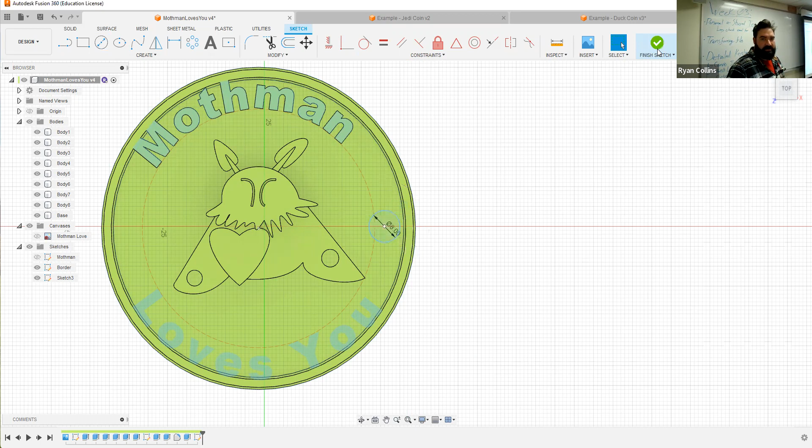Extrude that hole, or that sketch—I want to go downward, and it's just going to cut right through. Or again, I can use extent type to object and just select the bottom, and it's going to cut a hole straight through. That way, if I ever want to change the thickness of that bottom, it will keep doing so.

There you go, that works. If you want, add a fillet—select the whole inside circle, I don't know, 0.5 again. Just rounds it out, makes it a little bit easier.

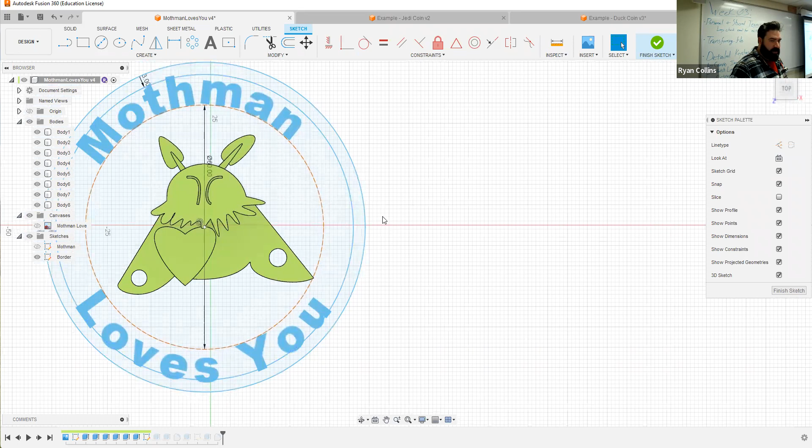You can also go back into your sketch, that border one, and instead maybe I want to add a little outcropping here. I'm going to use a 2-point circle just because I can make that circle start right at the edge, go out a little bit, and let's say it's a little bit larger, 8.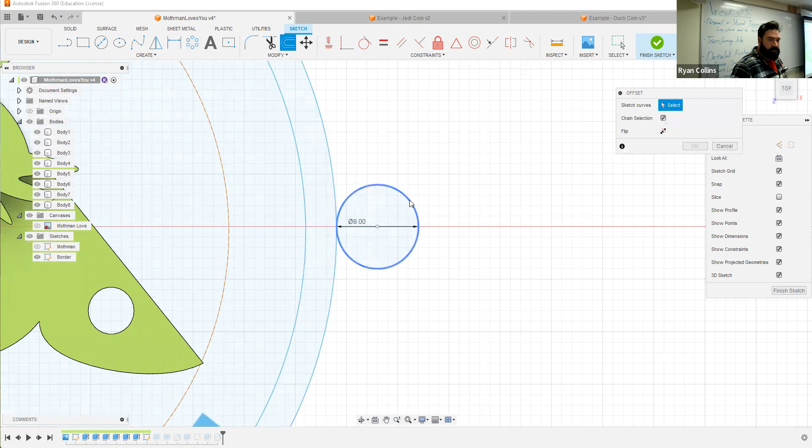Now, if I want to make sure this is going to have a hole in it, I can use my offset, go to there, shrink it in a little bit—let's say -2, -1 maybe. There we go, and let's just connect this a little bit here. I'm going to draw a couple of lines, just something like there to there, and there to there. Now, this is all kinds of wonky right now.

This isn't even connected, so I can use my constraints here. Let's use tangent, select that line to there, snaps out there, and to there. Oh, wait, there we go. Nope, that moves stuff around, don't want that. Repeat tangent, select to there. Oh darn, that's obnoxious. For some reason it's still wanting to select that, which is irritating, I don't know why it's doing that. Tangent that line to there.

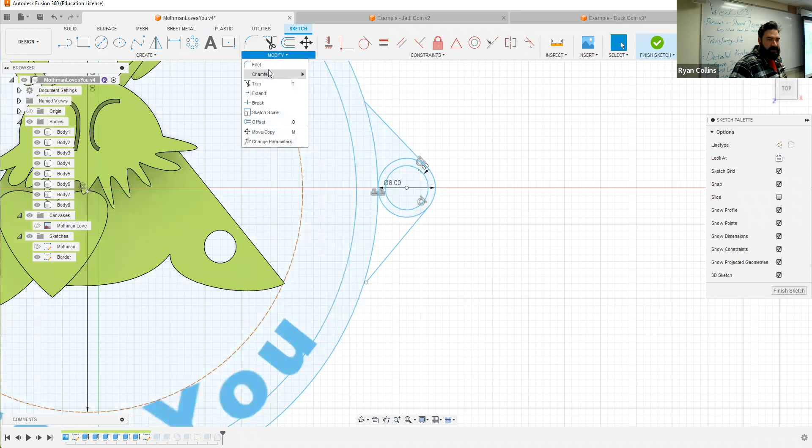It snaps back, and since that wasn't completely fixed, let's use the extend. That's going the other way. Well, that's just completely wrong. Tell you what, let's delete that and start that line over. Something like that, something like that.

But if you wanted this to be tangent to the outside, I don't know why it wasn't snapping there, but as I draw this line outward it'll snap to that outer ring. As I keep dragging it along, get further and further, bam, and it snaps out here. Should hit, there we go. You can see the cursor change to the little tangent symbol. Now that's at a tangent.

Now it's not up here, so I want to go back, select there, and it keeps moving the circle. I don't want that, that's really irritating, I don't know why it's doing that. Sometimes the tangent constraints work really funky because essentially you're fighting for hierarchy of what needs to stay where it is and what it can move around, so that gets a little funky.

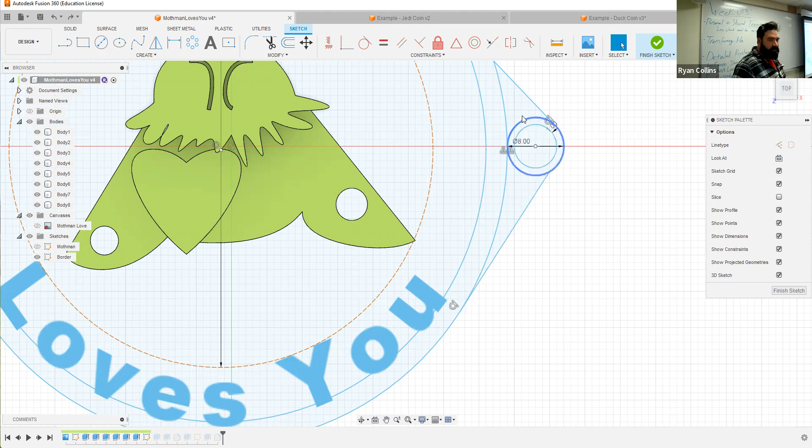If you run into stuff like that, what I have found is I'm going to switch that line to a construction line and start a new line. I'm going to use where that one starts because I know that's a tangent to there, and then drag this line out until it meets the tangent point to my other circle. There we go, that makes it a lot easier to deal with sometimes.

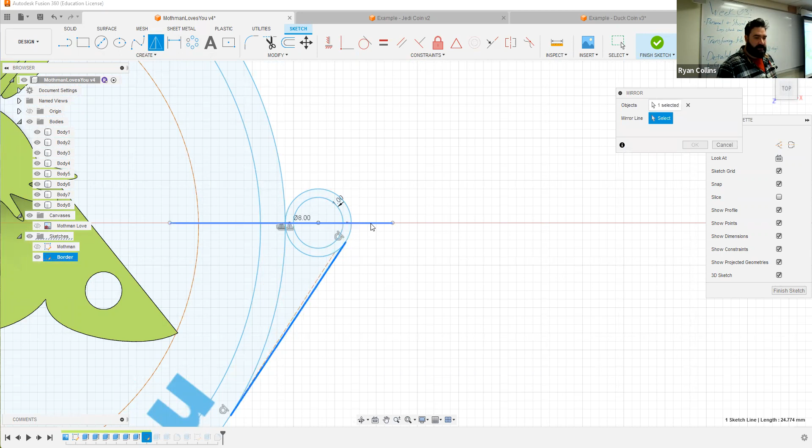And again, if you're having trouble with this thing up here, delete it. Run a construction line straight through the center, doesn't matter where to where as long as it's straight through. Then what I can do is just use a mirror line, select the object, select my mirror line, snaps over there. Boop, there we go. I forgot to turn that into a construction line.

Why is that not closed? Oh, that's funky, oh no, that's weird. But now I can try the tangent again. There we go, that worked, cool. Only it changed that one too. Oh my God, it's just getting frustrating now. Fine, I'll just delete all of you.

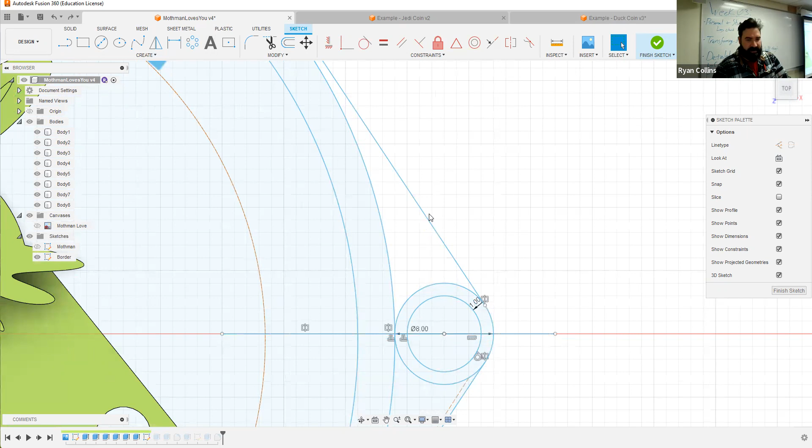Honestly, the only reason I was doing this, you could just draw this straight. Actually, that might be a little bit easier to deal with at this point. I was just trying to make this a little bit stronger as a thing, so I'm just going to draw a line straight across where it hits my main circle.

This is obnoxious. There, yeah, come on, catch up. Great, now it's freezing on me. There we go. Now when I'm moving this around and you see that red dotted line appear, that's just showing you it's definitely going 90 degrees out, or, oops, not at 90, 180. There we go, because it's going straight that way, however it locates. And I just want to make sure it actually snaps to the edge there.

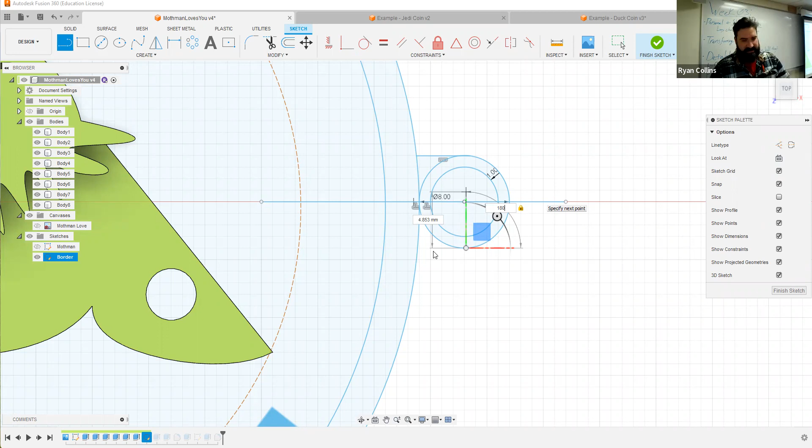If you want, you can make it overlap, doesn't matter, you can always trim that stuff off of there, makes it a little bit easier to deal with. And if I want to round this over, I can either leave it right there, which I think I'll do. Let's finish that sketch because that's just getting obnoxious. The only reason I was making this whole thing is so that way I can add

a key ring part to the outside. So now I'll go ahead and extrude. I just want that outside of that circle and those two little parts that I added on. Let's go downward instead of upwards, just going to drag it down a little bit. I don't know, 2 is too little, 3 is too much, so let's say 2.5. Only needs to be negative, that way, sure.

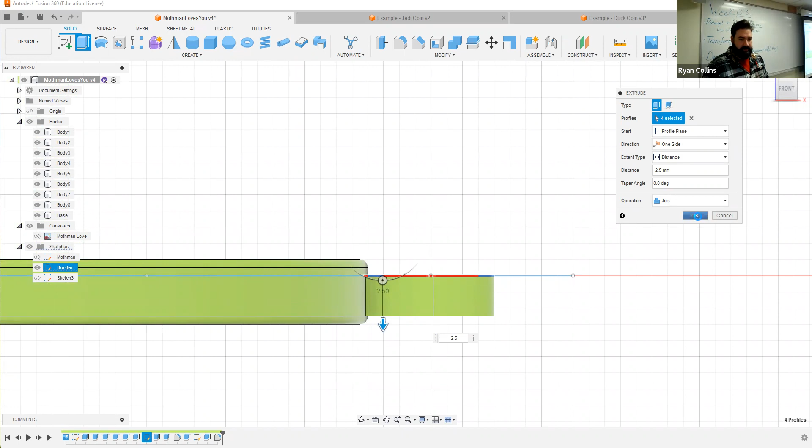Say join. Now this might be a problem later because it's floating like this. I might want to change that, but for right now I'm going to leave it. That joined, so that is now part of the whole base here. If I want to leave this just as a little tab sticking up, that's fine. But one of the other things I can throw in is I can choose a fillet on that corner.

And we'll do it on both sides here. Grab both of them, the same thing. And instead of filleting inward, this will fillet outward. See how it grows outward to blend to there. Makes it easier.

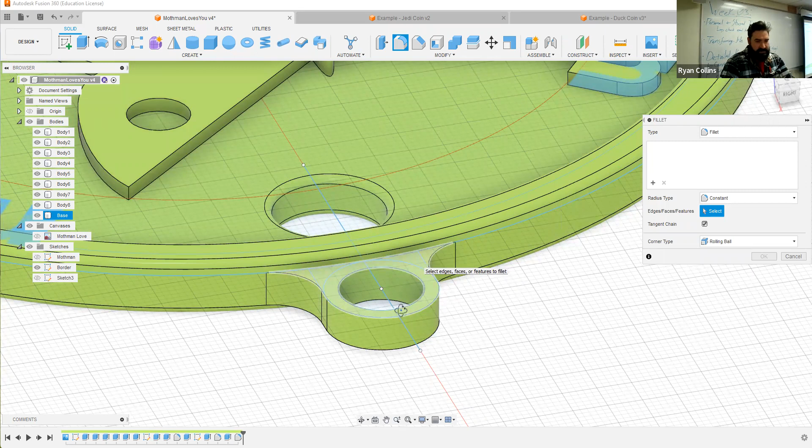A filleted corner is stronger than a 90-degree sharp corner. I can also add an additional fillet to the top and bottom there. Just select both faces. We'll say 0.5 again, a little tiny one. Ooh, that might be a little too much. Does some weird stuff, so let's say 0.2. That's a little less crazy. So that just rounds things over.

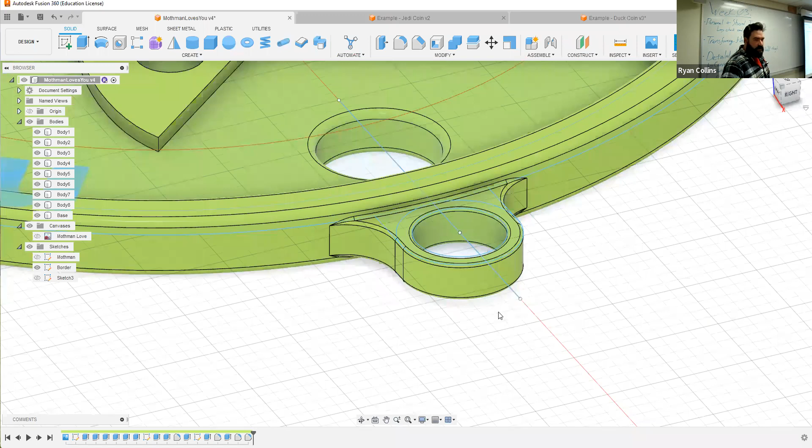It's not a necessity, but however you choose to make a keyhole or a string hole, or however you want to tie this to something, that's the way to do it. Either just cut a hole straight through the thing, or make a little feature on the outside. There you go, easy way to work.

So the main thing is extruding text does weird things. I encourage you, when you extrude text, don't leave it as separate bodies, just allow the thing to join automatically, unless you want to move stuff around or make alterations later. Otherwise you'll end up with just a slew of stuff.

If you want to print these, the last thing you need to make sure to do is combine. This is the join tool, combine. It'll do all the things that was at the bottom of your extrude toolbox. You can do this all after the fact. It just makes you select a target body. Doesn't matter which one, we'll use the base. Select all the other things.

You can go through individually or just use a selection box. Remember, if you click and hold from the left, it'll make a selection box, and everything completely inside that box will select. Or if you click and drag from the right, it's instead yellow and a dotted line, and anything that touches will select. So even if you're not all the way there, it'll select all the things. Or you can just go in and click them on the actual dropdown tree. There you go, compresses everything to one object.

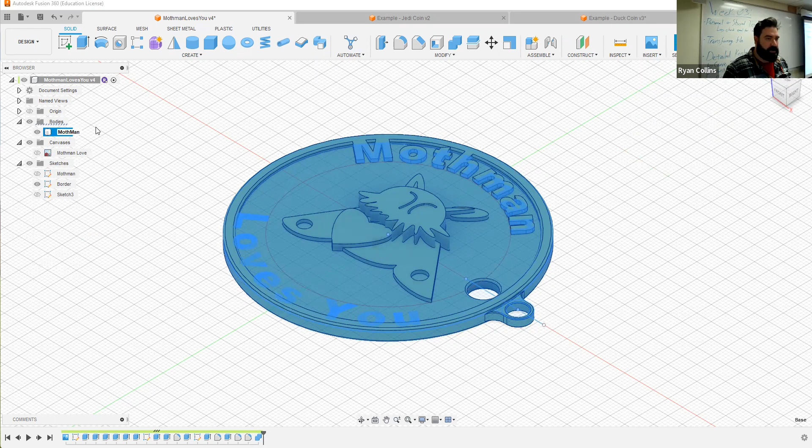And we can just now make that Mothman keychain. There we go. So obviously there's a bunch of other things I want to do to this, but that's a pretty simple way of working.

You can add text, I didn't add the 'loves you'. I do want to go back and alter the size of this sketch circle here, because I want these to be a little bit further in. Remember, because that's all a parametric build, I can go in there and make that alteration by right-clicking, edit sketch.

Let's see, that line, that is the 60 right there. So double click there, let's make that 55 instead. Brings that down a bit. Finish sketch, recalculates. Now everything's still at the end, it combined everything, joined everything, just now that's further away. So you can make those alterations as you need. It recalculates and you're good.

If you run into errors, it'll usually tell you. You'll see a highlighted spot down at the bottom. You can fix it as you need, or we can figure it out next time.

So hopefully that helped, I know it kind of jumped around a little bit because I'm addressing some different issues, but the main things are joining parts together, how to get text in there, how to get text along a path. You do not have to make this a round object, you don't have to make this a surrounding object around it. This was just a way that I wanted to add text onto it, and a convenient way to turn this into a keychain so it has some sort of hole to add string or whatever have you. So however you work, there you go.

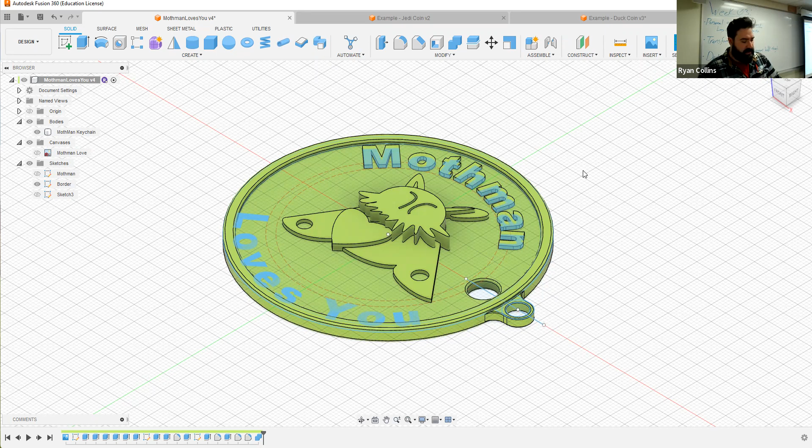Remember that you can add appearances by shifting back over to appearance mode, pressing Shift. It goes kind of like the steely color. Press A to bring up the toolbar. You can drag and drop colors onto this. This is not a requirement right now, but if you wanted to make this all different colors and such, more power to you. To do that, you just literally drag and drop what you want onto the thing, and it makes it that color. This does not in any way affect the print itself, it just makes it fun. Oops, I accidentally dragged something around.

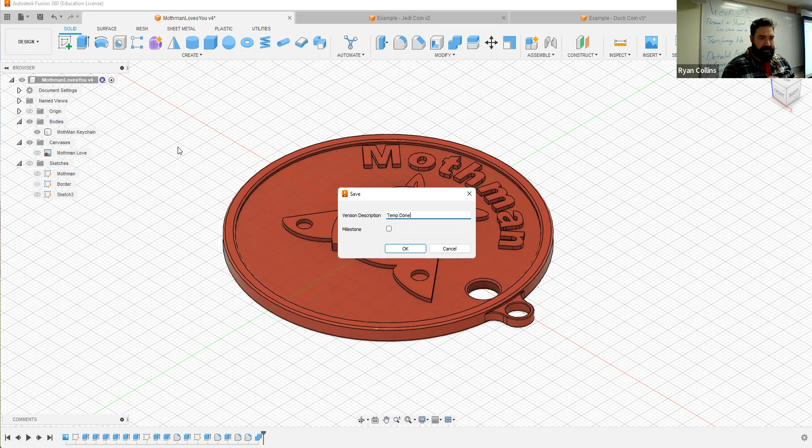That's all, just makes things a little bit different. But there you go, so you can change stuff around as you want, but that is not a requirement for right now. I'm going to save that. And done, and we'll make alterations later. All righty, so good luck with it.